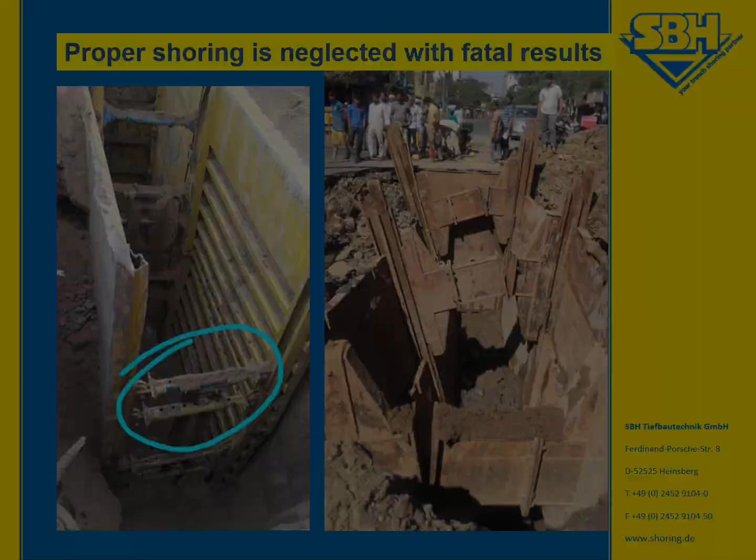But if you are talking to the people who are concerned, it has a very, very important relevance for our infrastructure to work, for our drainage system to be state of the art. And when we are executing projects, we need to make sure that our environment and our infrastructure adjacent to the project is still working. So the importance of shoring is usually underestimated, and we have a lot of failing performances which are causing a lot of delays in traffic, penalties for the contractors.

We have accidents, and we also are seeing a lot of counterfeit products which are not engineered or designed to withstand the soil pressure. So we have a gray market here, and it's making life difficult sometimes because prices are undercut with very cheap products, and you cannot compare those locally manufactured products from a little fabricator shop with our highly engineered and highly designed products from Germany.

So we are trying to avoid damages, we are trying to save and rescue buildings and roads and railways. And our mission and our passion in India is that we are finding like-minded people, customers, partners, consulting engineers, architects, designers, who are also with us in the mission and in the passion for safety in the project site.

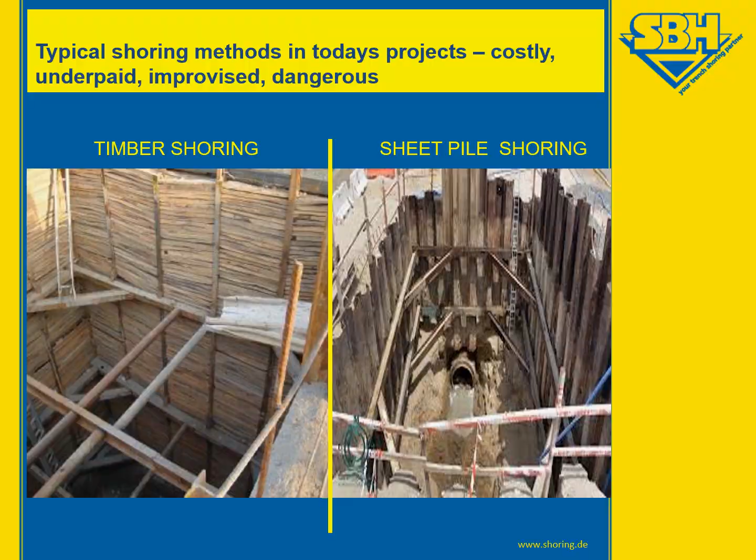Typically, shoring looks like this. We have old-fashioned traditional methods which are working somehow. We have timber shoring, we have a lot of sheet pile shoring with all the plus and minus related to them. We see simple wooden shoring just from a few planks. You are hammering together some improvised shoring. Of course, if soil conditions permit, you are going for open cut shoring.

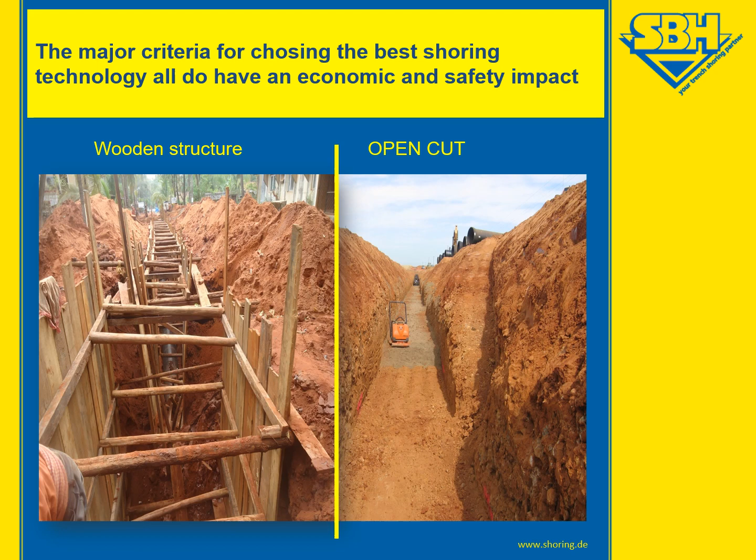Now, a few words about the company itself. SBH, as I mentioned, is a company sitting in Germany with the headquarters in the western part of Germany, nearby Cologne. And the company is in existence for about 30 years. It is family owned by Mr. Deussen. He has been regularly traveling to India. Now, because of the corona, we have to delay the visit a little bit, but surely we will come towards mid of the year.

The product range of the SBH shoring products is from very small and shallow trenches of 1.5 meter up to 10 meter depth and 12 meter width. You will see the applications later on, and we can say that the parts are from structural steel, heavily designed. We have no wear and tear, and it's a little bit like a plug and play Lego system for the workers and the technicians at site. We have automated robotic welding production systems. So this is the reason why we are concentrating on one manufacturing site in Germany only.

SBH is certified with all the ISO and TÜV standards. We are undergoing regularly our health and safety procedures, and we are really a state-of-the-art factory in Germany. We are usually asked whether or not we are planning to set up our plant or a subsidiary or joint venture here in India for production, and the answer to that is yes, we are considering, but we have to see that the economies of scale has to be there.

And even though we know that it is cheaper in terms of labor cost to manufacture in India, because we have a very highly automated production, it will be very difficult to beat our quality and to cut our costing by manufacturing the product of the same standard in India. But we are open for opportunities. So if you have any idea how we can work together in India, you are welcome.

We started about 2001, 2002 with our first little testing of the waters, and since 2010, 2011 we have our own team here in India on the ground. We do site training, we do seminars, technical seminars with chambers, with contractors, with the water authorities, and they are always well received, and we are happy that we really have a nice and good presence in India.

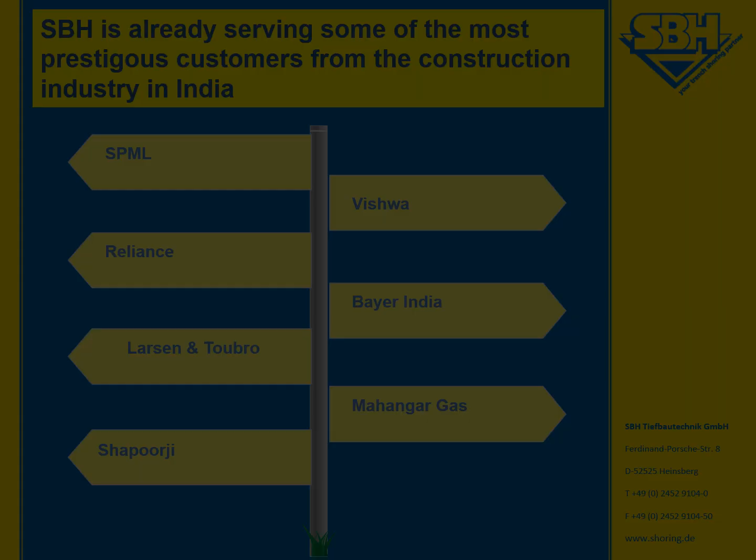This is a short video by one of the engineers of Larsen & Toubro. You can click on the YouTube link provided here, and you can hear from one of the people on the ground who are working with the system.

Now I would like to go into a little bit more detail of the benefits and the technical and commercial aspects of our system. Now, if you are in the position to use our system, the following advantages apply. We have a much better project planning, and we are very safe in the execution of the work. We have a much better cost-benefit structure, and you will make a better profit in the execution of the project. One reason for that is that you have much less soil for removal and replacing.

We have no damages to the adjacent properties. We are avoiding unsafe conditions for the workers, and usually the project is finished 3 times faster than by using conventional methods. Our system doesn't require any repairs at all. There is no hydraulic, there is no electronics, it's just metal. And of course, by using the system, there will be scratches and a bit of wear and tear on the paint, but the functionality is always given. We have much less requirement for people and for workers. And obviously, we are also not having any issue with disposals.

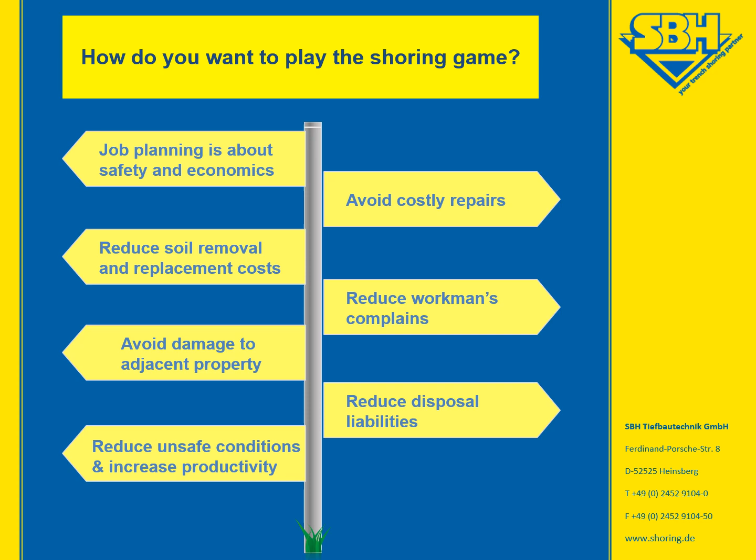And the next one is of critical importance when you are judging our system. We have a 10-year warranty on the system, and that means that you can use the system hundreds of times over. And one customer in Mumbai, for instance, they are using our system for the last 8 or 9 years already. So it's more or less unlimited reusage, and this is bringing down your average costing dramatically. So you really have to take that into consideration, and this is giving us a little bit of a hurdle when we are talking to potential customers, because they will see the one-time investment at the beginning.

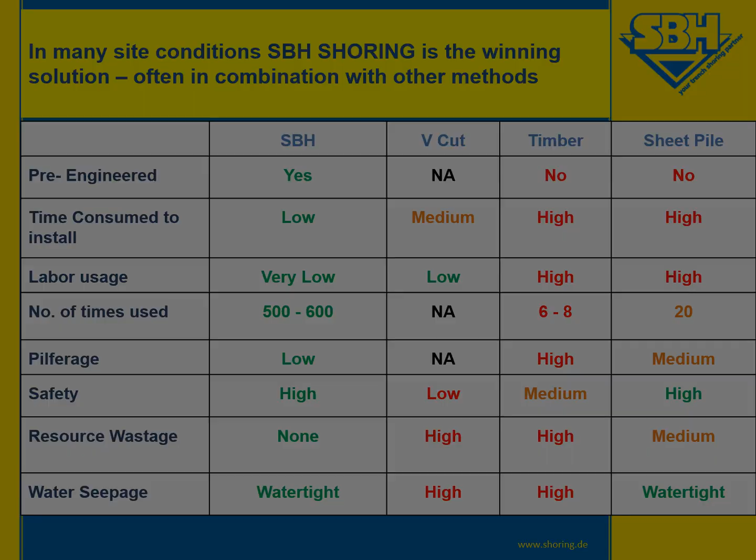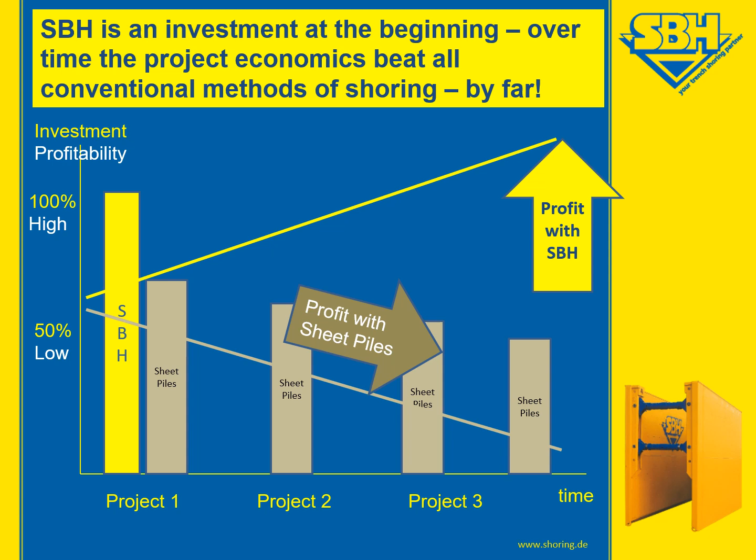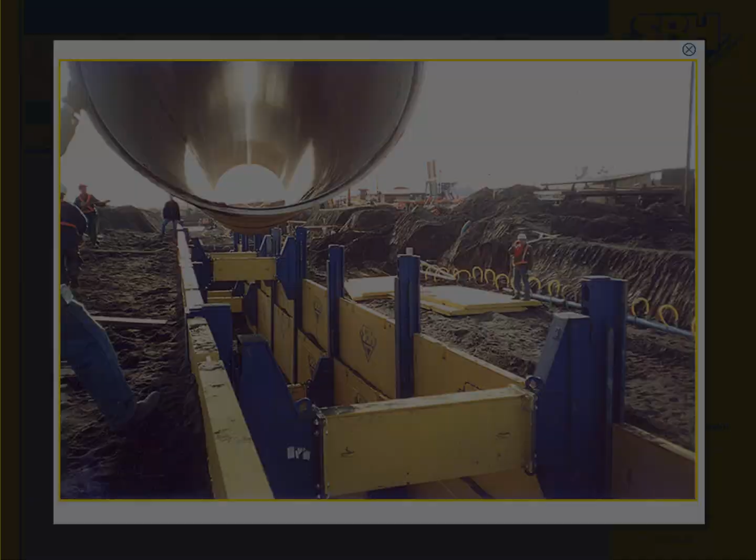Now, in the next couple of slides, I show you some video tutorials and site pictures. Here we see a site where we are laying pipelines. I would say roughly that is a 30-meter stretch, and we are going 4 or 5 meter deep, which is a typical working depth of our system.

Here again we see a 5-minute video, and you just need to click or retype the link on YouTube. That will give you a good explanation and an animation of how the system is installed. Here again is a second video of a graphic animation, which will explain in depth the application and the usage of the slide rail systems.

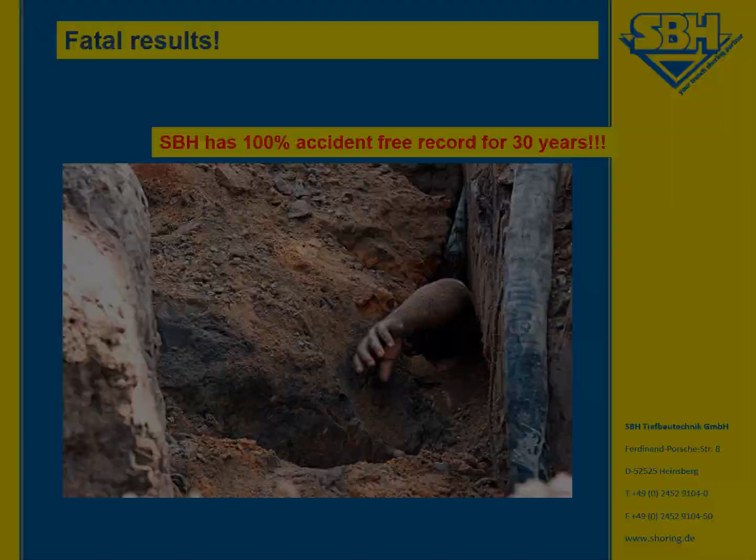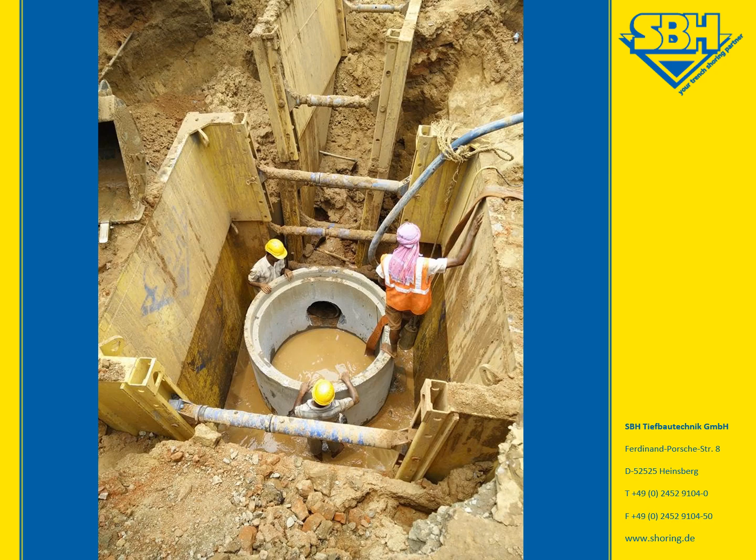Pictures of sites in India. Here we see a drainage being done, all very muddy and dirty, but that's the name of the game if you are working in these conditions. Here you see that the system is standing in water, in high water levels. It's not 100% waterproof, and you need a dewatering system if you want to remove the water and work on the ground level.

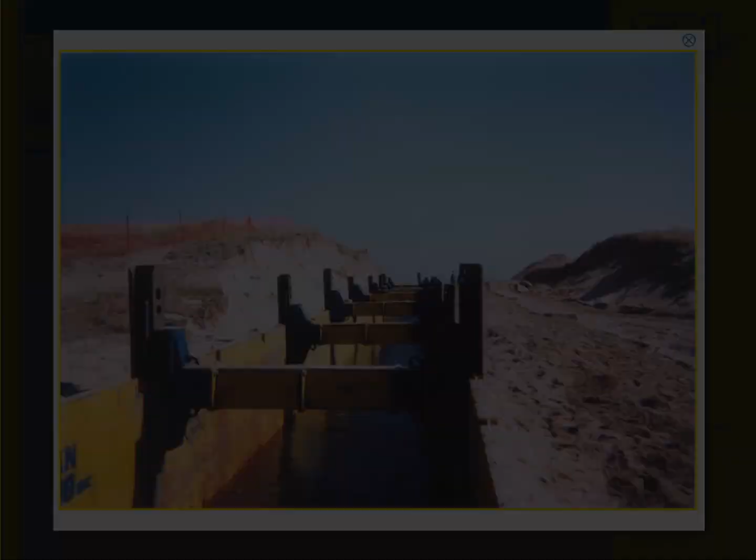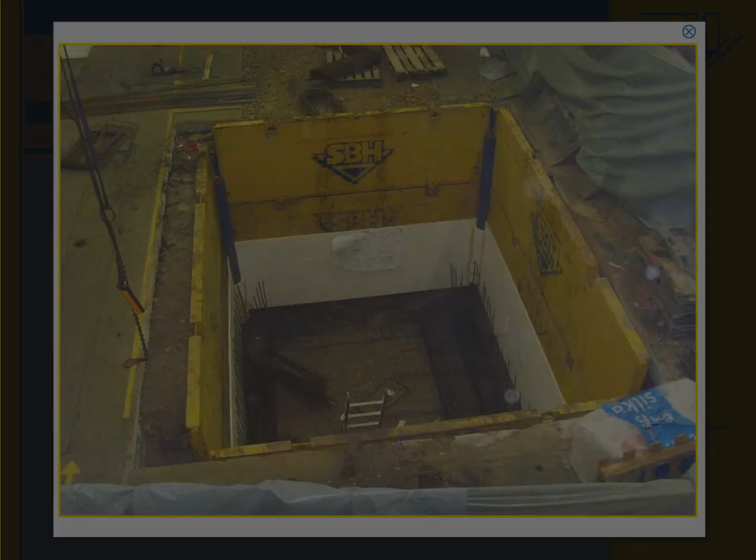Similar here, you have a high water table and you need to pump the water out in order to get access to the ground. Manhole shoring. Again, a quite deep site in India. You have around about 6 meter depths here, and very stable, very solid structure. The workers are safe and sound, and they can complete their work with no worry, and the system is 100% safe and secure.

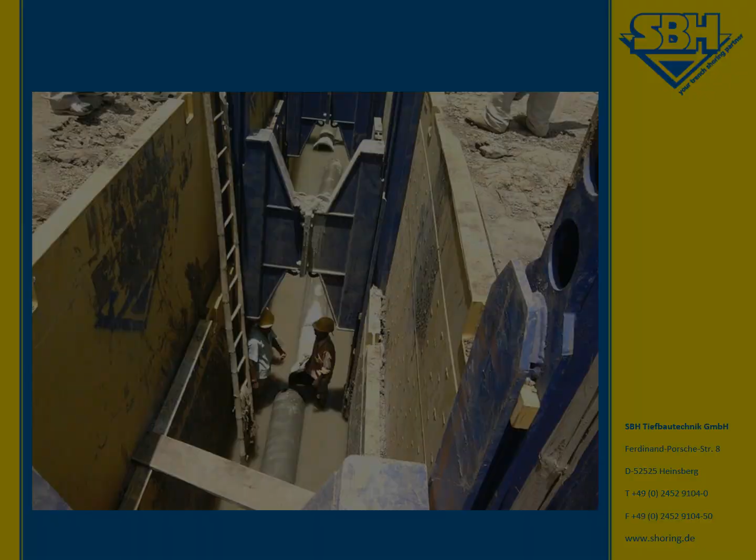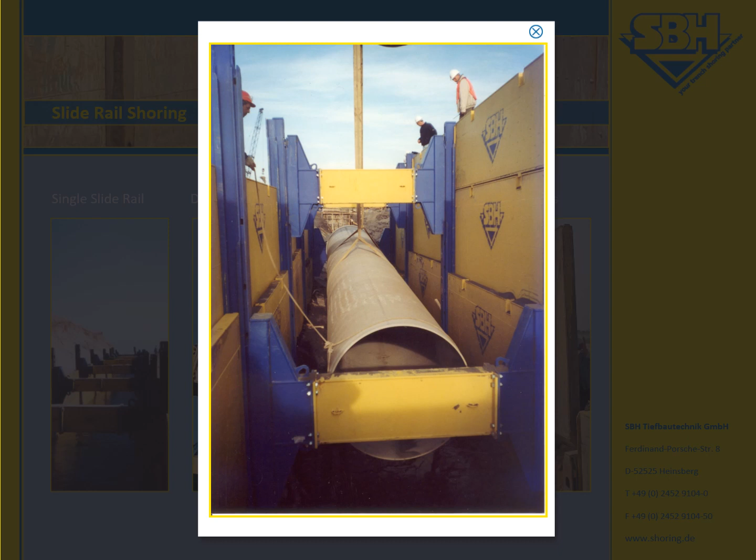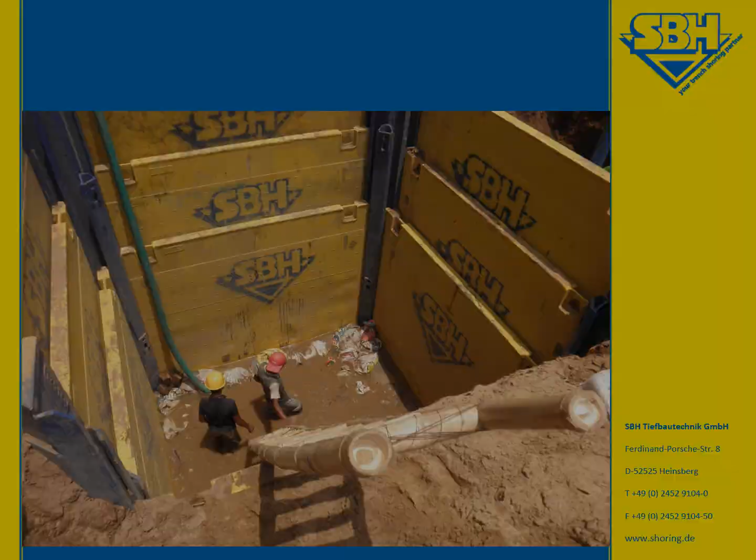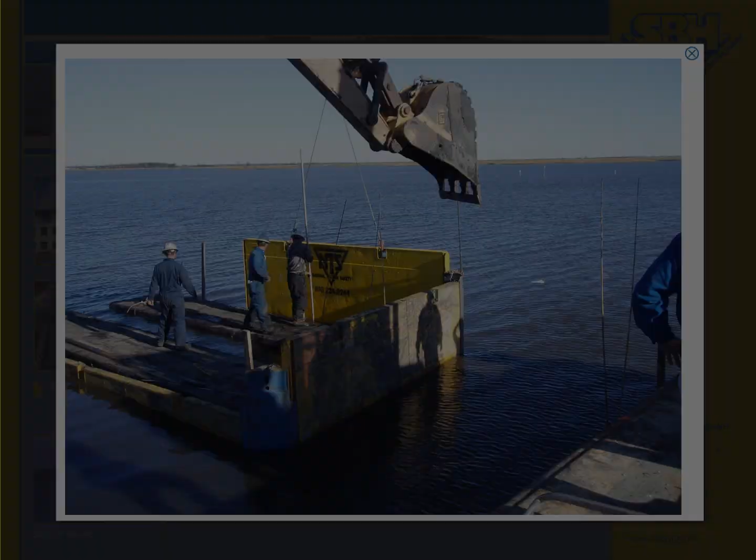Again, a pipe laying job, and by removing or moving the hydraulic struts up and down, you will find enough space to bring down the pipe safely and securely. This one is very deep, about 8-9 meters, and again, a very safe environment, and the work can be done. Here we are nearly completely offshore, just nearby the seaside. Also there's no damage, the metal is holding in the water obviously, and the work can be continued.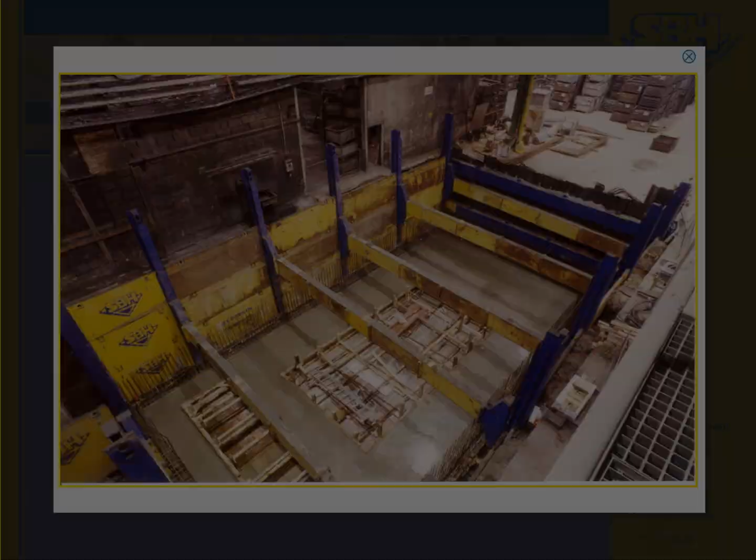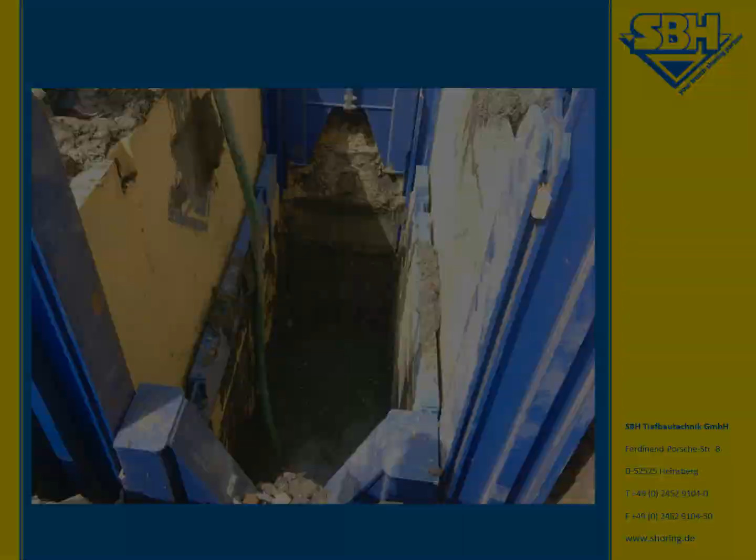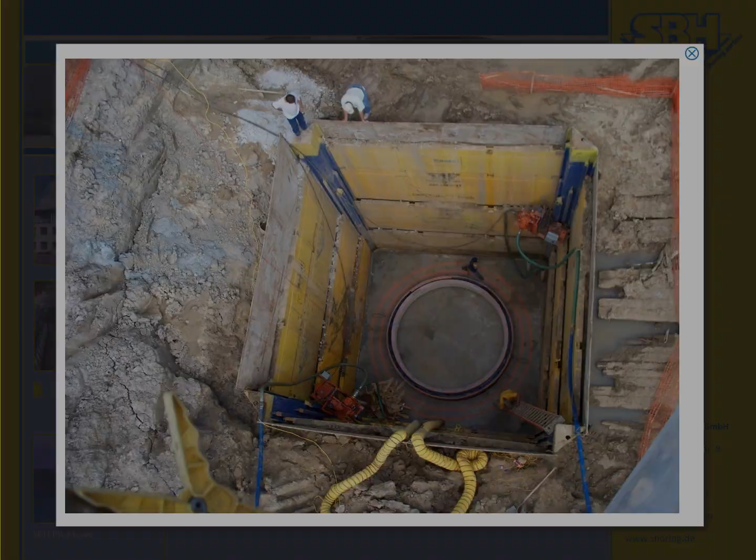Here again, very muddy and difficult soil to work in, but the system is performing well and nicely, and the job is completed. This is a very large site, 10-12 meter width, and because of the modular structure, you can always get the extension pieces and widen the width of the construction site. Another picture from a site. Drone view from above. Again, pretty dirty work to be done.

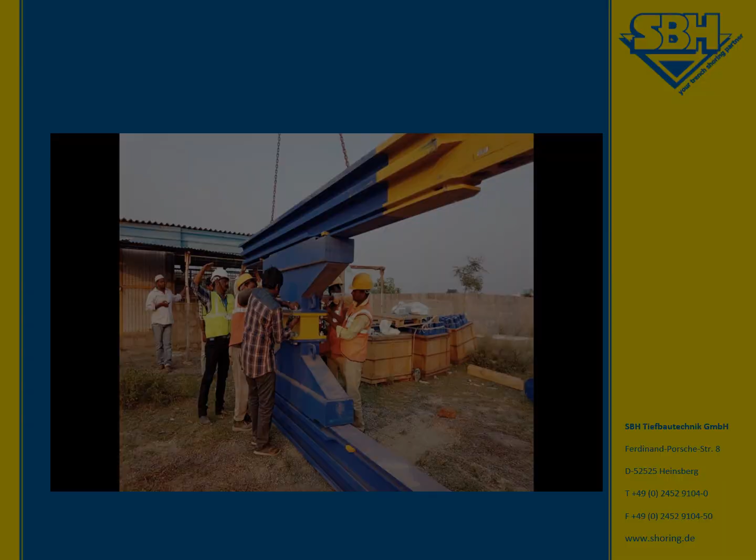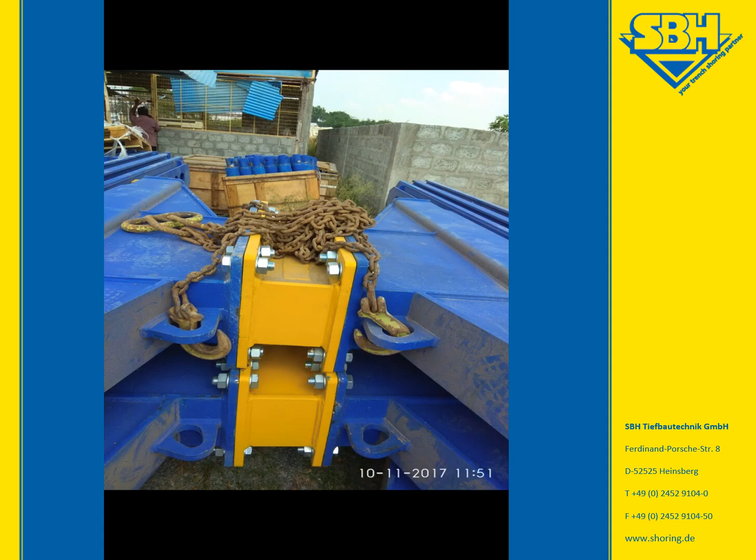Here we see the handling and the maneuvering for the installation of the equipment. Here you see Jogan performing his work as a technical advisor and trainer. Some accessories we always supply, like chains and hooks you need to have in order for the excavator to lift the system up and down. The excavator driver is very important. The driver has to be skillful, and he must be precise in the movements and follow the directions of the technical supervisor. That is the key for installing and removing the system nicely.

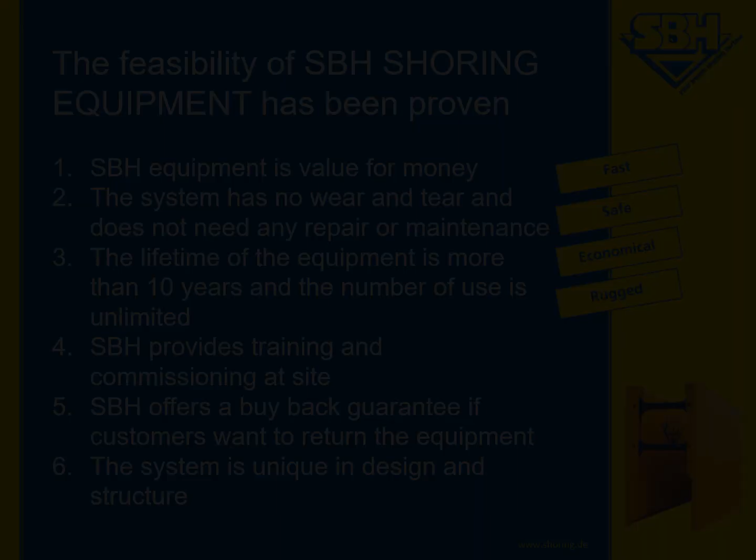So another summary before we come to the close of this little presentation. We really tell you that SBH equipment is value for money. You have a number of benefits we have explained. We have a guaranteed lifetime of 10 years. We always have training and commissioning on the site. If you are running into any problem, we are there within 24 hours. We even give you a buyback guarantee in case you decide to return the system.

And we are assuring you that this is a very unique system in design and structure. And even though on the internet you will find some local manufacturers who are claiming to sell you strong shoring systems, you don't want to work in a deep trench if you are not sure that the shoring is provided by SBH.